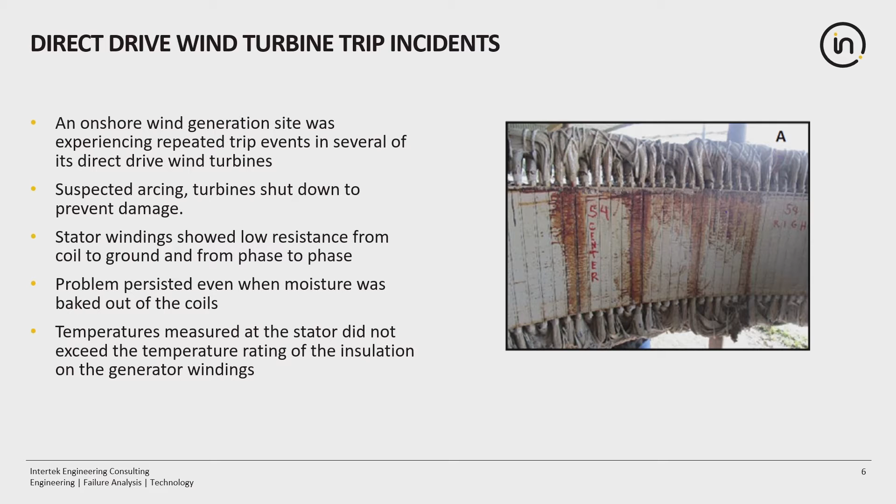So they started to work the problem: why is my insulation failing? They got together with their OEM, who was very supportive of their operations on site. Of course, they were still in warranty, so some people have mixed experiences with that. But we're talking about operational excellence, and there was some really good stuff here.

They got together and decided to do some test rewinds on some of the units in the key areas where they were seeing melting. They were going to replace the existing conductor with a higher capacity current conductor and increase the amount of insulation so that the resistance from phase to phase within the motor was high enough to continue operation. There was no evidence of arcing shorts in any of the windings when they were taken apart, so they weren't concerned about the loss of total insulation within the unit.

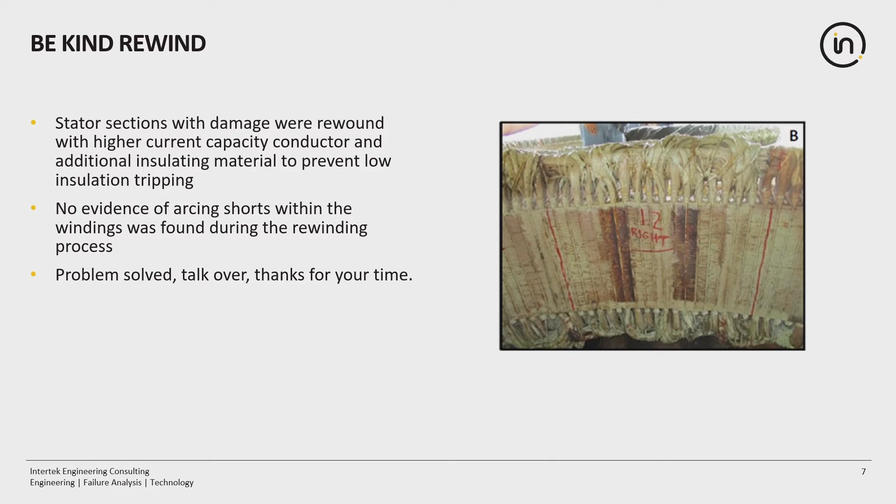They buttoned things up and began operating again. Of course, if that was where my slideshow ended, I'd be well under time. And so we know that did not solve the problem.

In fact, less than 3 months after rewinding the units, they started seeing the same sort of trip signals. They opened up the units and found that the places where the rewind was performed had a much more aggressive quantity of insulation and melted, degraded material, both in the individual coils as well as migrated out through the ferrite stack.

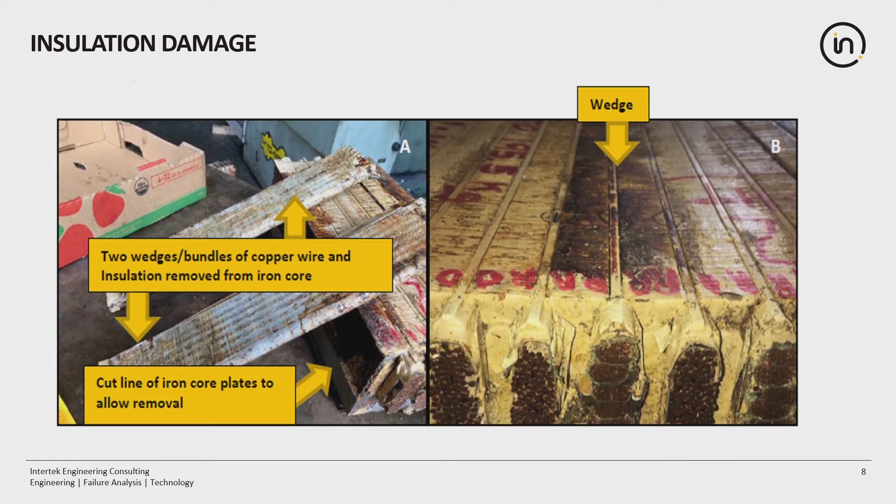So we can see detail here. The replacement windings, you'll look, are substantially degraded. Some of them have some dark material that was from cutting. We confirmed with the vendor that they were using a high-speed saw, so that wasn't actually induced from the generator itself. It's good to know, if they hadn't been keeping track of that information.

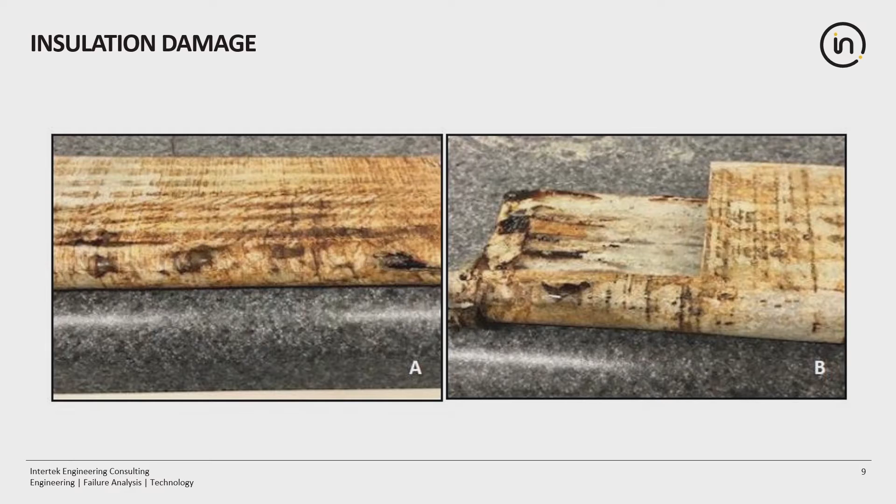It would have been better if they had used something a little gentler to cut it, but they were in a hurry to get it out and get it back to us, so we try to remind people that how you extract your samples impacts how quickly it takes to figure out what's going on with them. But we looked and found that they had double wrapped with fiberglass, and the material within the fiberglass insulation had migrated substantially.

There was a concern from the operator that the supplier of the rewinding and the original equipment had not furnished appropriate insulation. It was supposed to be NEMA Class F insulation, which can go up to about 145 degrees C. And so we performed testing to verify the material content.

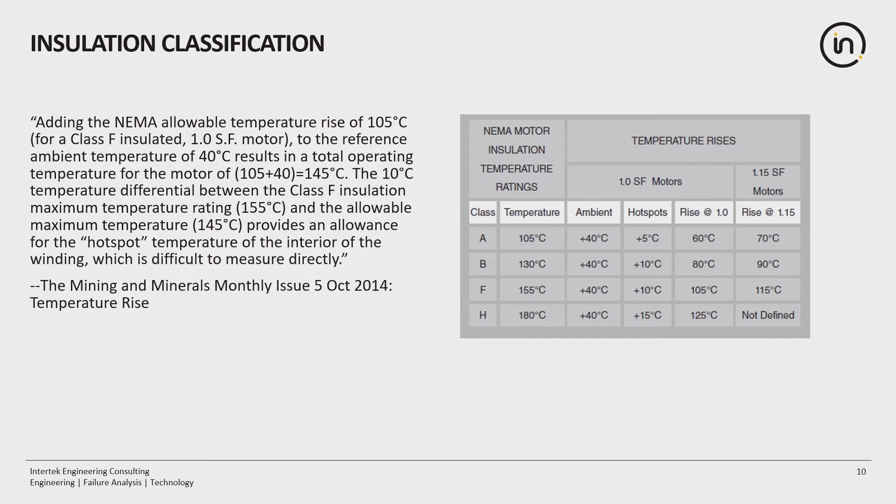Of the fresh rewound units, because they were doing this on multiple units, they were able to pause the process and get us samples at different steps, both the replacement and the original hardware. We tested a wide variety of it using FTIR, DSC, TGA, and visible spectroscopy techniques to validate the chemistry, bonding, degree of polymerization, and all of the resins, epoxies and fibers within. Every section of everything we found was determined to be consistent with a Class F insulation.

When this insulation was measured in the damaged state, it did not perform up to the task because it had been degraded. However, from the fresh, new insulation material that we had, we were able to discern that you cannot physically get resin migration below about 180°C. That was the first onset of melting observed across all of the materials.

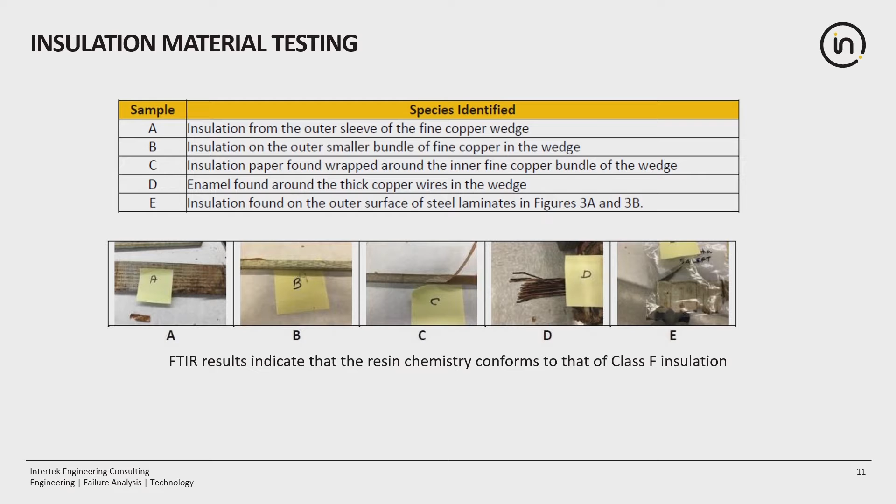If you have liquid leaking out of the coil, you know you're well above that 145 safe operating limit. The insulation damage on the factory and repaired sections were the same, and the DSC analysis suggested that the stator temperatures were around 180 to 200°C, and that was what was causing the enamel to be degraded and migrate.

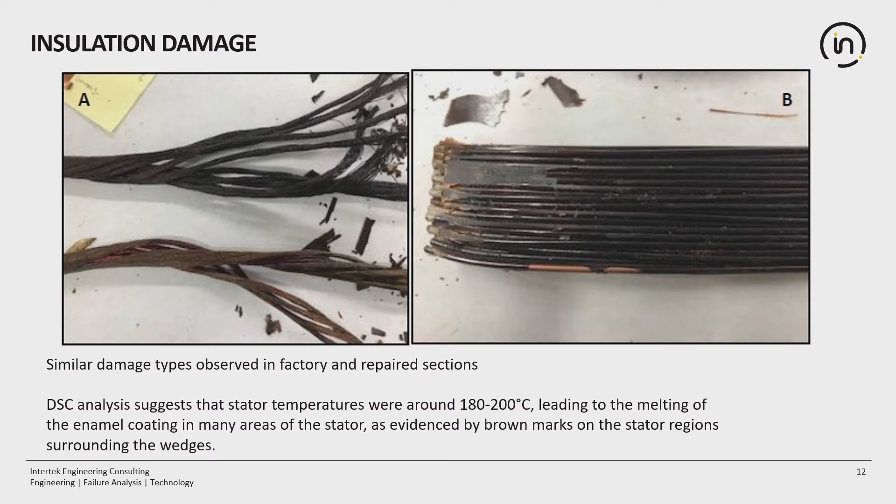So the ops person comes back and says, but I'm not measuring any temperatures above 120°C, right? So obviously they have a temperature signal.

However, it totally ignored the fact that the nacelle as a whole was not operating as one thermal volume. It was basically two thermal systems separated by the turbine deck, which isolated heat transfer from the air volume below and above. The below volume being inaccessible also meant that when water accumulated, it stayed there for a while, could ingress into the coils, and dissolve partially some of the polymers, loosening them up and reducing their ability to withstand current.

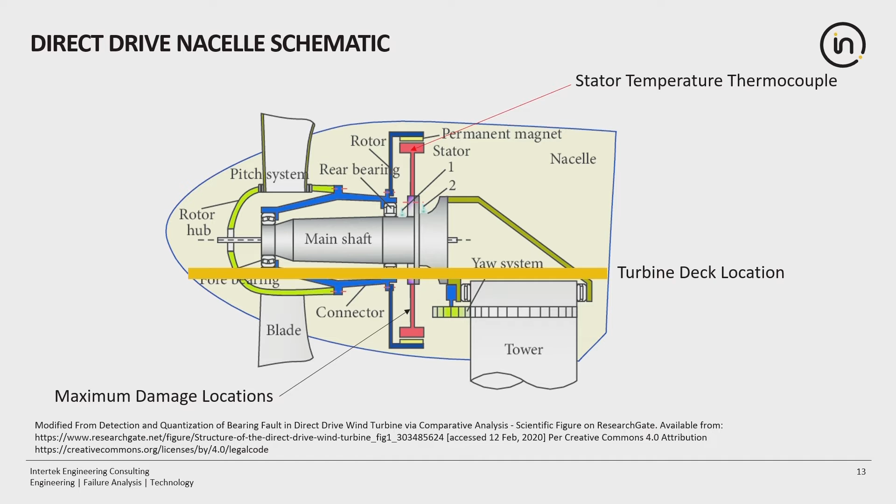So what does this mean? It means we have a measurement, but it's in the wrong location. When we looked at the damage map from all of the units, every single one of them, most of the damage was between the 8 o'clock and 5 o'clock position on the stator. So pretty clearly everything below the turbine deck was getting heated up, and it didn't matter what the temperature above the turbine deck was.

That was a big clue that this wasn't insulation degradation caused by current or induced by some electronic problem or manufacturing or rewinding problem, but that this damage was a thermal problem, which suddenly made everything make sense. Initially these units had started to fail prematurely, sure, but we're talking about 5-6 years in the field from commissioning.

When the repair happened, it was only in a few months. Why would that be? When they did the repair, they increased the current carrying capacity of each coil in the damaged section, and then they doubled up on the insulation.

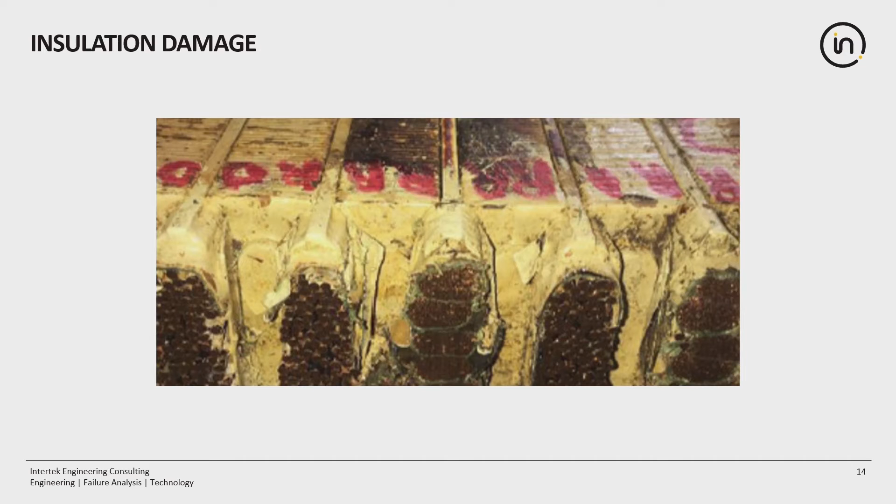Doubling up the insulation sounds great to prevent electrical faults, except for the fact that the electrical faults are being induced by heat generated in the conductors melting the insulation. If you double up on the amount of insulation, you're much more likely to have heat stay in the conductor near the wire, where it's going to damage the insulation, melt things, and continue this cascading failure.

So the stator insulation failure was driven primarily by thermal degradation, assisted by moisture ingress. We had localized elevated temperature degrading the enamel. There was a lot of turbulence on this site, and because of the way the direct drive works, the magnetic field is not uniform during operations, especially when there's a lot of non-uniform loading on the blades and speed changes.

And turbulence acting on it. Basically, magnetic slip compensates and allows the direct drive to move at different speeds. When that slip occurs, you have hot spots that get generated. They're very hard to model. So post-repair, they failed a lot faster because they didn't mitigate any of the underlying issues.

The takeaways here: operating safely can prevent expensive catastrophic events, right? They did stop operating when they were getting this repeat error that could have turned into a fire. Even when everyone's working together, it's possible to hurt yourself a lot by not solving the problem before you understand it. You want to examine your equipment, your operations, and environment while identifying and troubleshooting a failure. Otherwise, you'll miss the context that's telling you what the root cause is.

Another takeaway: electrical insulators are typically good thermal insulators, which means if you have a heat problem, they're going to make it worse. Having a sensor does not mean that you're measuring what's important, so you need to think about sensors in context, and a holistic view of failure enables safer, more productive operations.

Everybody coming together at the very end means that they managed to solve this problem. They redesigned the cooling system, and they're going to be operating for years to come.

I haven't heard from them at all. It's been very bad for my bank account, but very good for the customers.

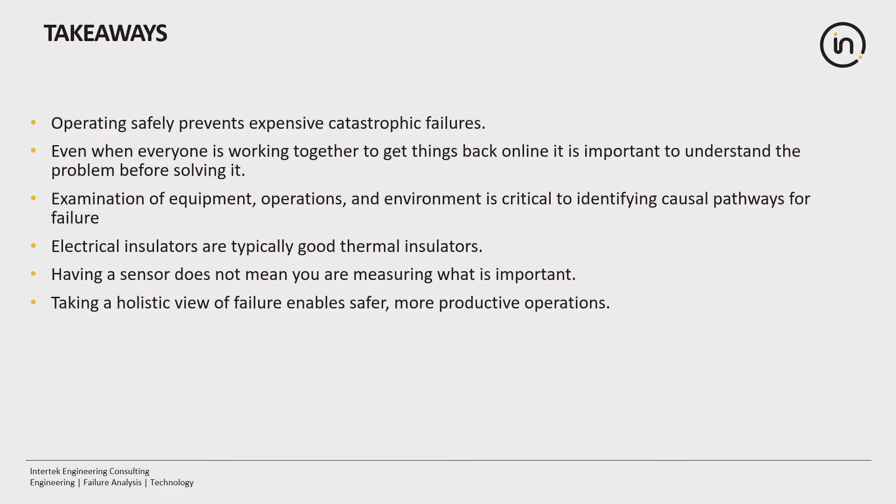Thank you, John. Very interesting. How many times have we thought that we knew what the problem was, we implemented a fix, and then the problem started happening more rapidly, right? It's a questioning attitude that's really, really important.

So I want to continue on with this theme, and I'm going to welcome Kim. Kim, same question: who are you and why are you here?

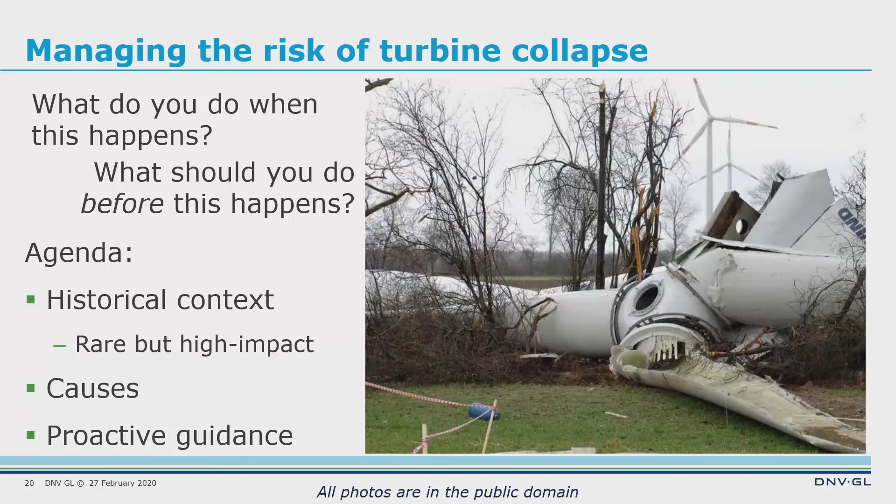So, what do you do when a turbine collapses? In this talk, I'll be discussing how common or uncommon turbine collapses are, some of the causes, and really trying to provide some guidance for mitigating the risk, and essentially answering the question: what do you do before this happens? I will start with the data that we were looking at.

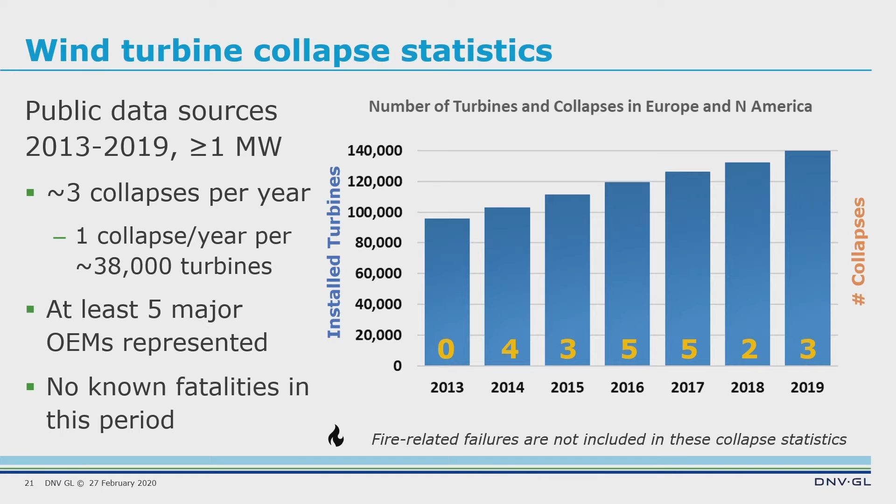These were spread across 5 major OEMs. There were a few of the 22 collapses where the OEM has not been identified. During this period and in this region, there weren't fatalities involved, and there was also no impact on the public that we know of. Just to note that fire-related failures are not discussed here; it's a topic for an entirely different talk.

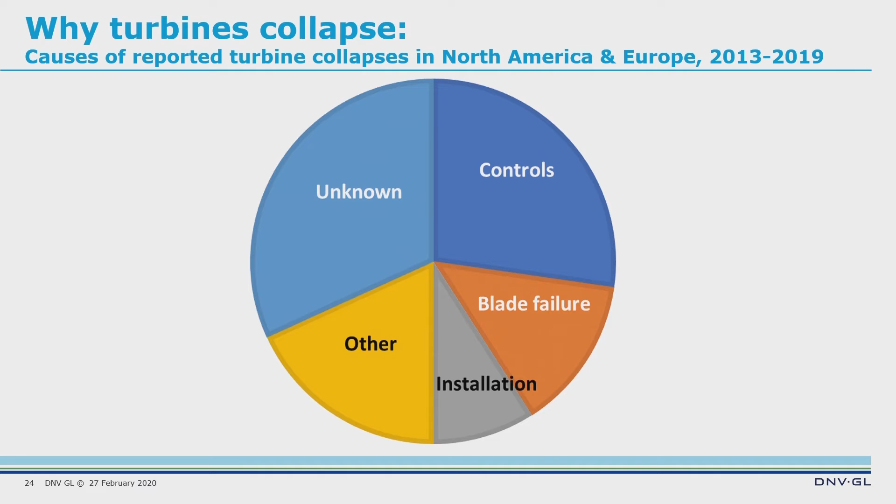So let's start with what are the causes of these collapses. We divided them into categories where it was known. In about a third of cases we didn't have a cause that we were aware of or had access to, so any of these other categories could be broader. Controls I will talk about more in detail, and then the other ones I will basically mention in terms of how you would mitigate the risks. You can look through these later.

So what do we mean when we say controls was a cause of turbine collapse? I will give a couple of brief examples. In one example, a pitch system failed to pitch the blades, so the rotor was not able to slow down, and instead it led to an overspeed, and the stress on the turbine tower caused it to collapse.

In another instance, sometimes collapse is caused by a slow or relatively slow response to a very rapid change in environmental conditions. For example, if the blade finds itself in a kind of deep stall condition and the turbine controls aren't able to rectify that situation fast enough, then the blade can strike the tower and the tower collapses.

You can hear that in these examples, there's a couple of different aspects to the control systems. There is the software, the algorithm telling the turbine what to do and what takes priority. And then there's also the physical hardware, for example, a pitch motor. So the reliability of both of those components is critical.

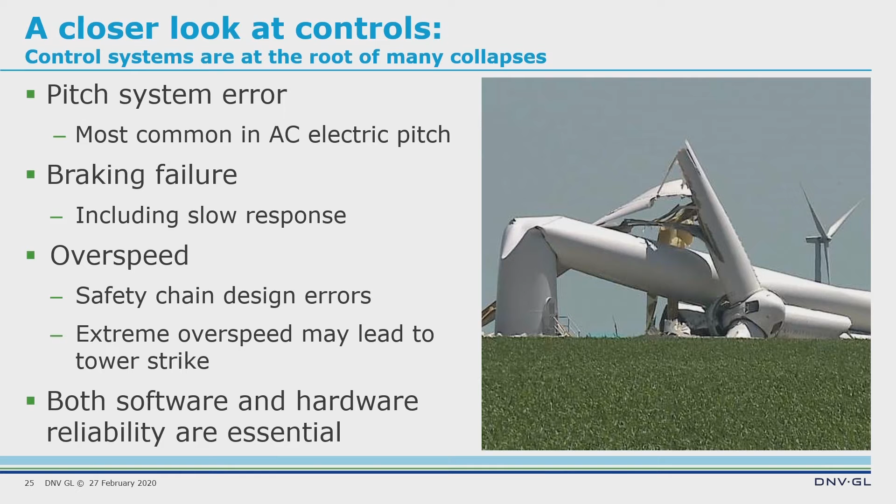So let's talk a little bit about what you can do before the collapse to mitigate your risk. Again, starting with controls, we have just heard a case for a root cause analysis. In this case, we'd also recommend a thorough, independent, and timely root cause analysis. That's true even if a turbine collapses on your site, but also if it's a similar technology elsewhere in the world, then you're asking the OEM about that root cause analysis.

If you know that this is caused by the control system, our strongest advice here is to get your control system updated promptly. And that does require a relationship with the OEM, so it is more of a challenge for turbines that are no longer supported by OEMs.

Also just raising a question here, as turbine controls become more and more complex, so they're already regulating turbine performance, they're being used for loads management, and they're also involved in the safety chain, are the IEC standards to which turbines are certified evolving as rapidly as the changes in turbine control systems? I think it's an interesting question to discuss.

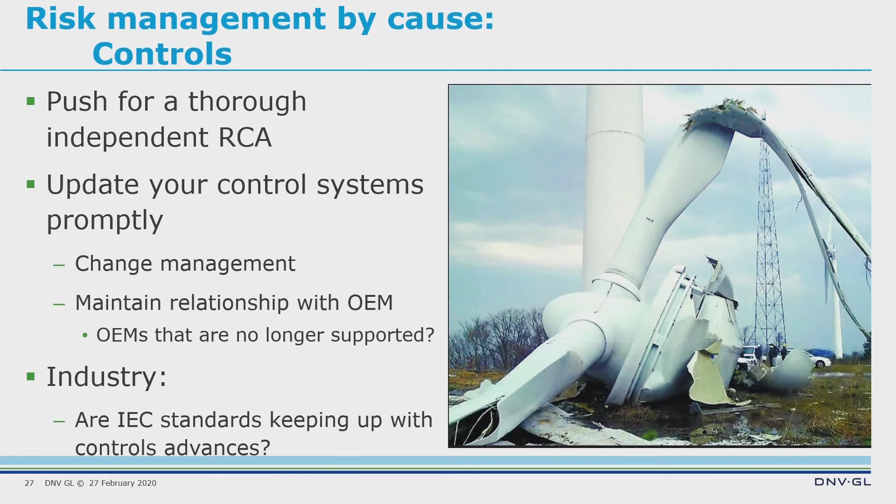So blades, you have heard at least one mechanism for collapse would be if a blade strikes a tower, but there are other potential mechanisms. For example, a blade had been repaired, but it subsequently failed. It did not strike the tower, but the turbine wasn't able to recover from the imbalance that was caused by the sudden blade failure, and that tower also collapsed.

My colleagues found, they reported a few years ago that about half of blade failures were caused by a manufacturing defect. So we are really recommending that you understand the quality of your blades right from the very beginning. So visiting the factory if that's possible. And then throughout the life cycle of the blade, following through with inspections and documenting and recording repairs so you can really understand the history of the blades in your fleet.

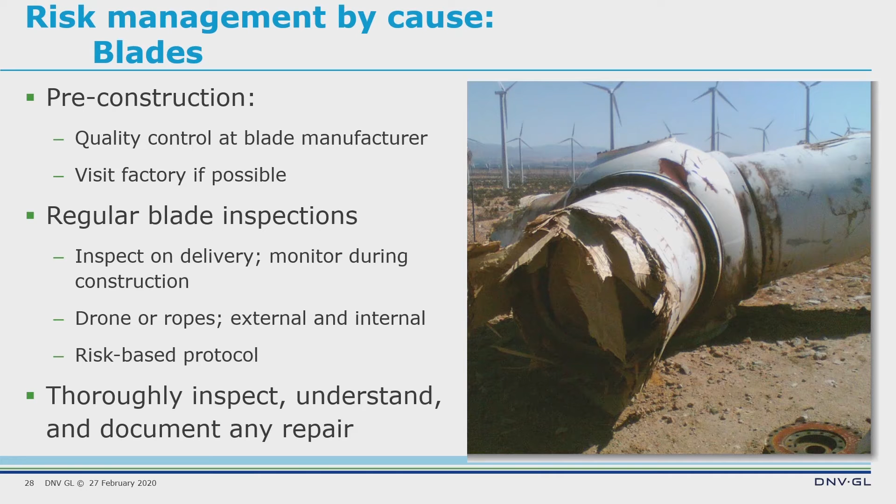We will hear more about foundations, and I think see this image again later. So I'll only note here that we advise storing data such as tower vibration data historically so that you can look for trends later to better assess the health of your tower and foundations.

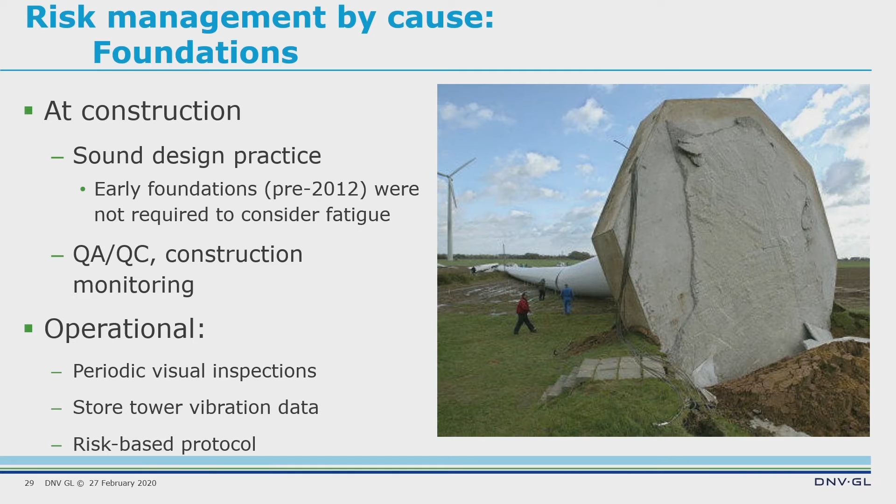With construction, I will only note that, as production tax credit deadlines near, it can be more challenging, as we know, to maintain operational excellence, to maintain quality and safety measures. And we certainly know that many folks in the industry are doing that. Just want to emphasize its criticality for mitigating the risk of disasters such as the ones we're talking about.

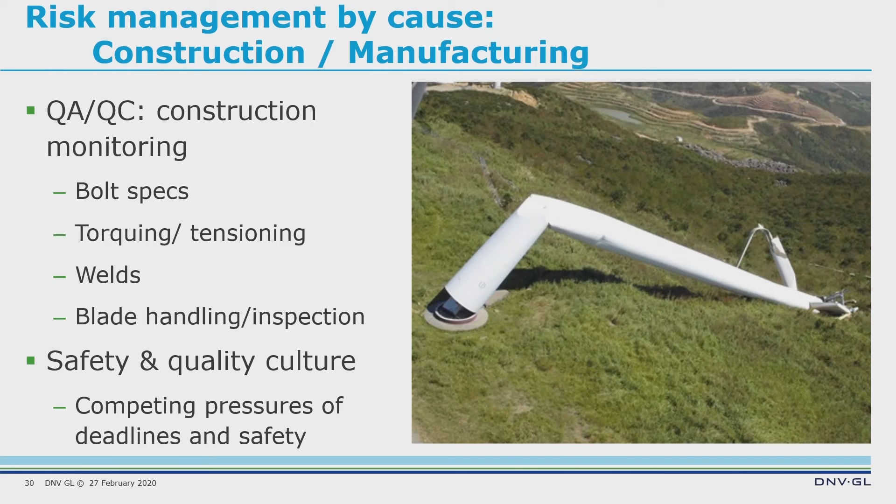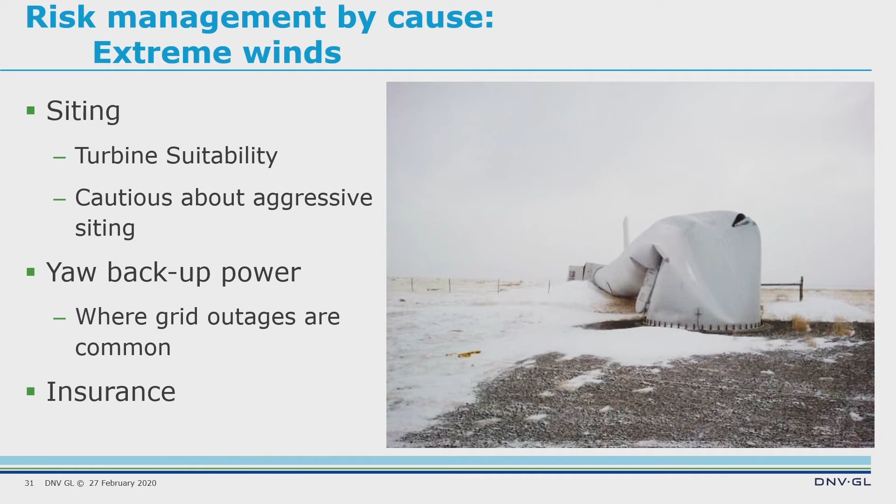Now, extreme winds also occasionally cause turbine collapses. There's a few things you can do in the development phase or when you're setting up a wind farm, but in the end it may come down to the insurance terms if an extreme wind event hits your site. So in that case, we really recommend understanding the terms, understanding what your risk exposure is.

For example, if force majeure and if lightning is not covered, what will you do in that situation, kind of understanding your risk there. And being aware that if a turbine does collapse, it can take more than a year to be replaced. So evaluating that in your business plan.

So finally, if we have one, well, we have a couple of major takeaways here, right? So we're certainly advocating for operational excellence, following best practices at all stages, from the construction right through operations life cycle of the wind farm.

And we also strongly urge people to understand any updates to the control system and to implement those promptly. We really just can't say strongly enough how much we advocate sharing of data across the industry so that we can learn from each other's issues.

And finally, the images that I've showed in this presentation thus far can be kind of dramatic and can be used to scare the public. And so we want to say that we showed here through statistics, the risk of turbine collapse is there, but it's relatively rare. And there have been no known impacts to the public, so the risk to the public is very small. And that we as an industry are kind of sharing that relevant information and also sharing that we're doing all that we can to mitigate risks of disasters.

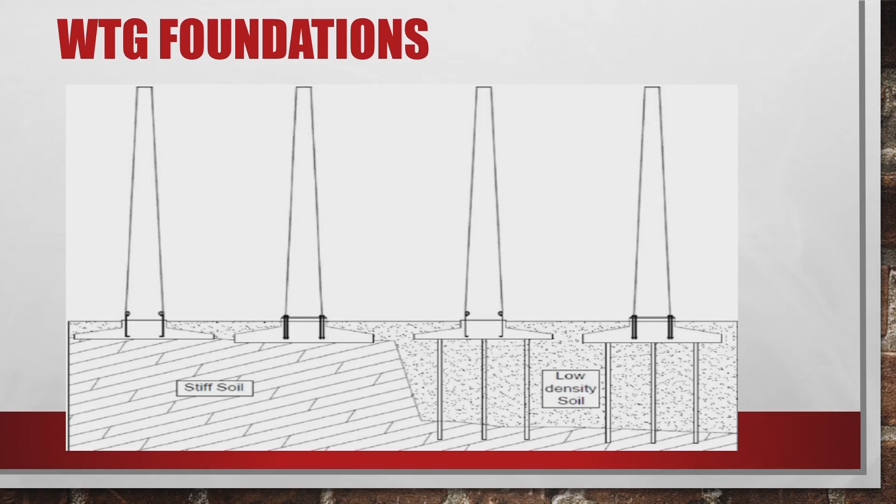Now this sketch, the reason I put this in here is to give you an order of magnitude of the scale. This drawing is to scale, so you can see that little thing down there at the bottom. That's what I do, and that's where you have to pay attention.

The other important thing to keep in mind, and this is pretty much true across the board, I don't think there's any exceptions. I haven't found one anyway; if there is, I'm sure someone will correct me. There is no turbine manufacturer out there today that will warranty or guarantee the foundation. They only warranty or guarantee up to the tower, and the foundation is the contractor's or designer's responsibility. That's very important to understand, because all of the warranties and guarantees you get stop where that flange meets the foundation. So it's apparent why it's very important to pay attention to it.

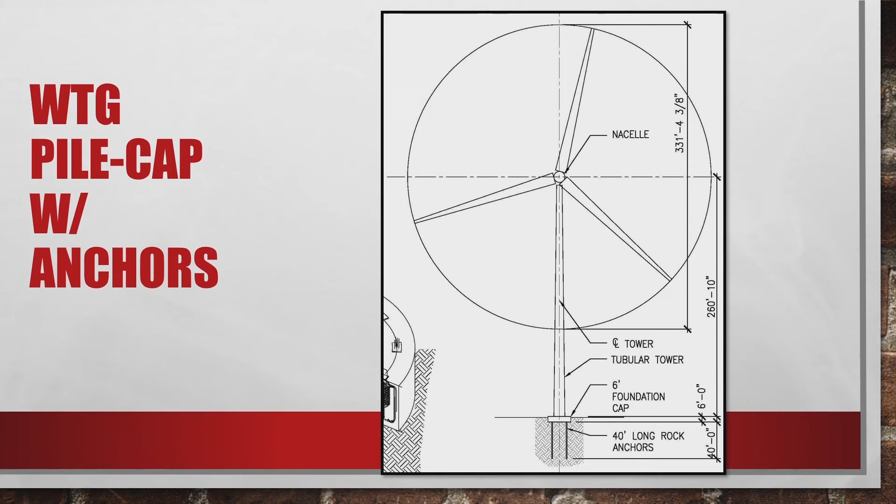My colleague earlier talked about issues with the nacelle, but foundation issues will shorten the service life, and they can, for lack of a better term, kill a project if they're not designed properly. So what do you look for? The biggest clues, and the first thing to remember, and I hope if anything you get out of this presentation today, is to at least look, because most people don't even want to look. But cracks, tilt, fatigue failure, and loss of rotational stiffness.

So what the tower designers have done is that they have allowed... well, so here are the scare photos. These are the scary photos, right?

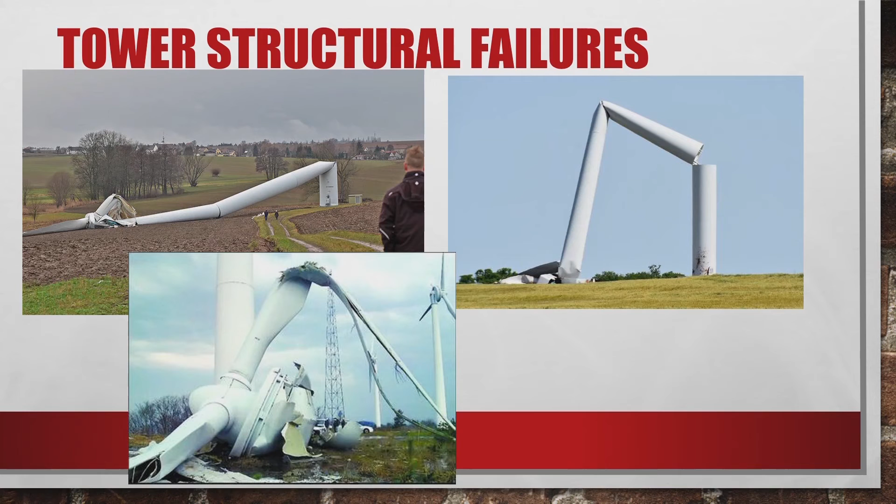No names, right? Everything is just somebody's project, so we don't want foundation failures. They're rare, but they do happen. This one is available - I downloaded this from the internet.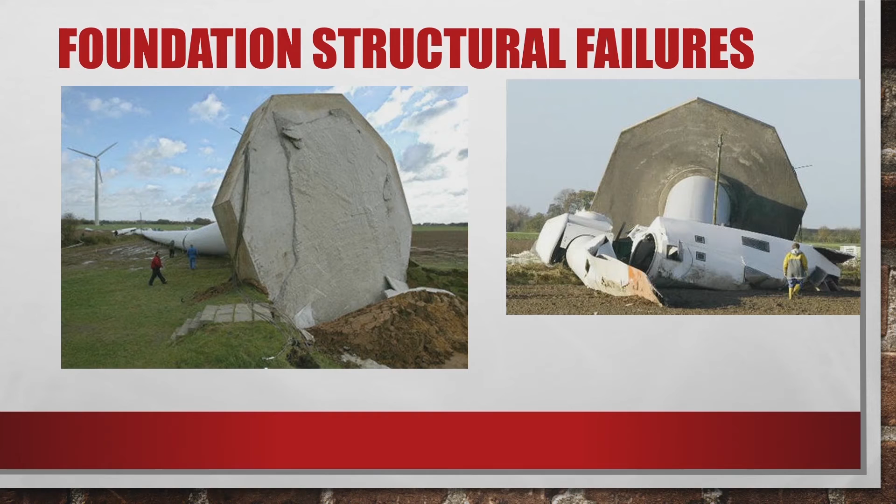But before they actually reach that point, even a little bit of tilt can render your tower dysfunctional. That's not technically a catastrophe, but if a tower is not able to function and generate power, that's a financial catastrophe. And then, if it gets worse, it gets worse.

As I was talking about, the growth of the industry is unbelievable. Things are getting bigger, larger, heavier, more demanding. It's gotten a lot more sophisticated. We've gone from little 6.6 kWs to now 5-megawatt turbines, and they're getting larger - 130 diameter rotors, these things are huge. That means you have to pay more attention to what's underground, which nobody warranties, nobody guarantees.

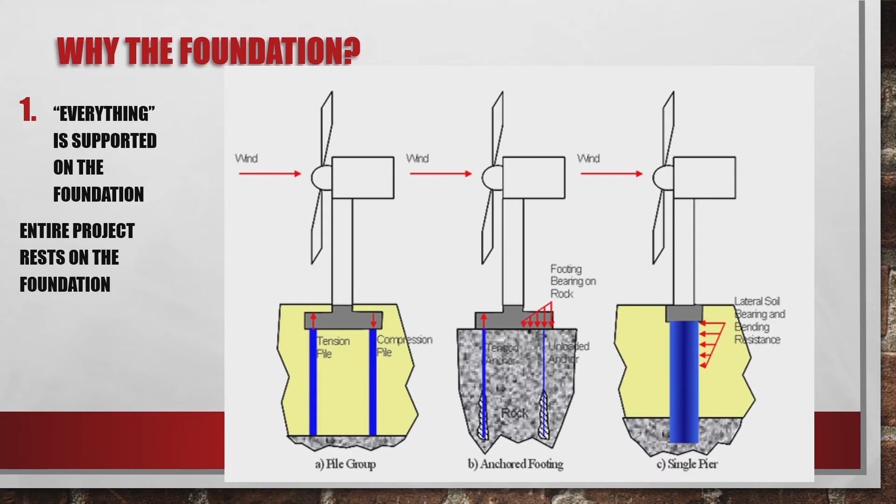So you as a project developer or project O&M manager need to pay attention to those things. As I said earlier, everything is supported on the foundation. So what do you look for? I'll give you a couple quick pointers of clues that you should be paying attention to that you can do on your own. You don't have to hire anybody or spend a lot of money, but before a foundation is going to actually show real signs of distress, it's going to give you clues. It's going to tell you that it's sick and that it needs attention. And they're very simple clues.

The first one is any amount of rotation. And when we're talking about rotation, we are talking about down to the 10th of a degree, or possibly even the 100th of a degree, which you can't visually see, but you can measure using some very basic instruments without having to hire anybody.

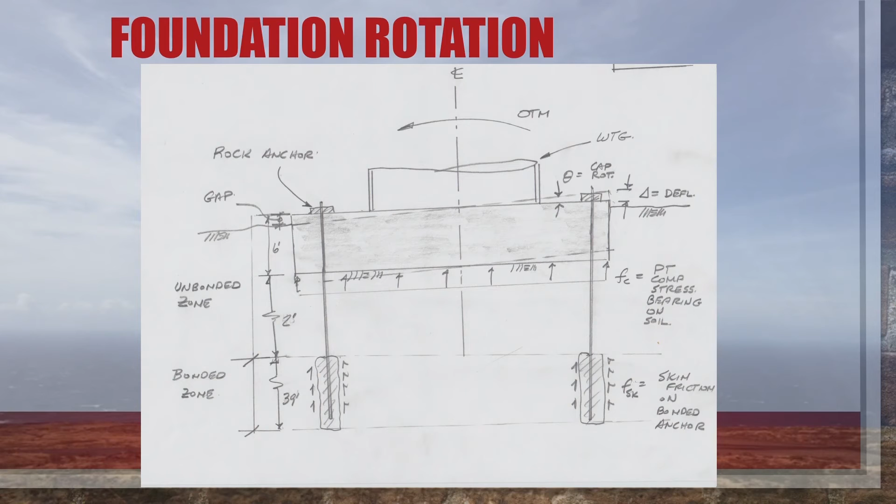And if you see - because the rotational demand on the foundation is very, very tight. Remember, I told you earlier, the tower designer and everybody above the flange line don't take responsibility for the foundation. So what they do is dump all those requirements on us, and we have to make that very rigid. So the first thing is rotation.

These are just some sample details from various projects, not any specific project. Here's the real equation: a very small amount of rotation is magnified up at the top with a tower tilt. So the foundation is very important - you need to measure that rotation and measure your tower deflections on a regular basis when they're obviously not operating or on shutdown mode, so you can see them in their true vertical or close to vertical, because there are limits on what that range is.

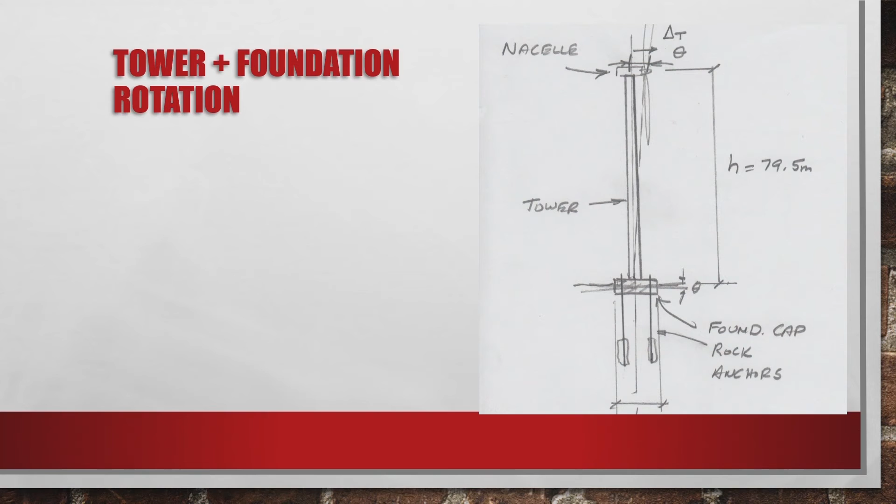Those limits vary from turbine manufacturer to turbine, from Vestas to Gamesa. They all have different ranges, but they all fall within a bandwidth. All of the turbine manufacturers have this - and this is all highly confidential to each manufacturer, so I won't mention any names or specifics. But for your specific project, there will be a range, and that range is good, bad, and ugly. Good is okay, of course. Bad, well, you can still operate, and ugly is, of course, ugly. So you've got to pay attention to that.

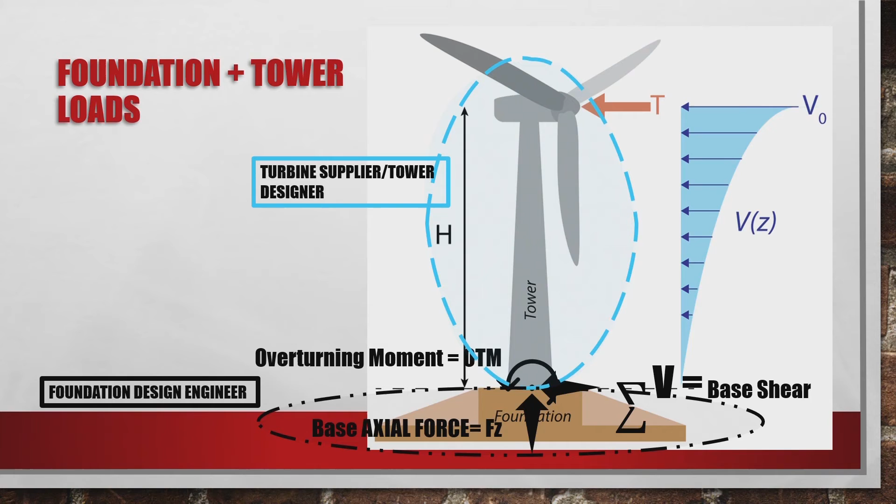Different kinds of foundations require different kinds of observations, but everything you're looking for is going to be found at the base - deflection, and the other one is cracking. We as civil engineers design all of our foundations to crack first before they fail. So cracking, even though it's ugly, is a signal that something worse is about to happen. We do the same thing with buildings too - we want them to crack first before they fail.

And you understand why? Because we want you to get out before it fails. We don't like the building to collapse, but having dead people is not a good thing to have on a resume. So we want you out of there. We actually design it to crack - it's meant to crack first.

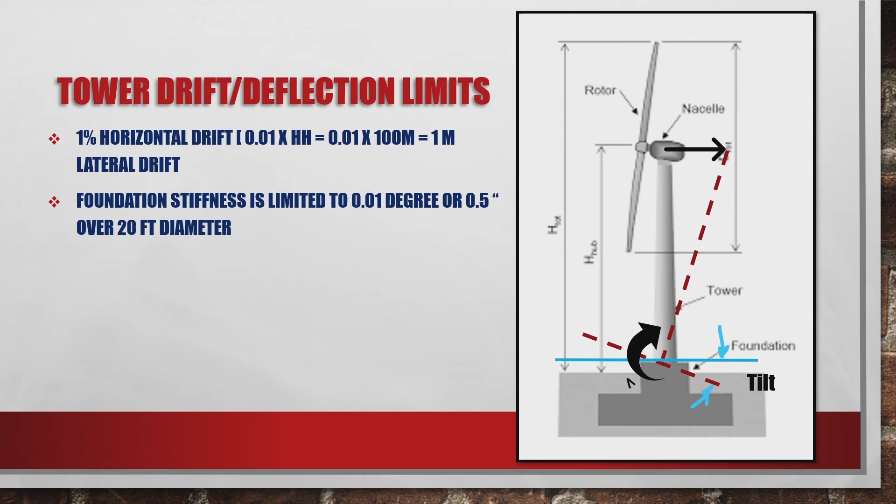These are signs, again, from various projects that I've worked on. I've been doing forensic work for 20 years for insurance companies and for owners, so I have a lot of these slides.

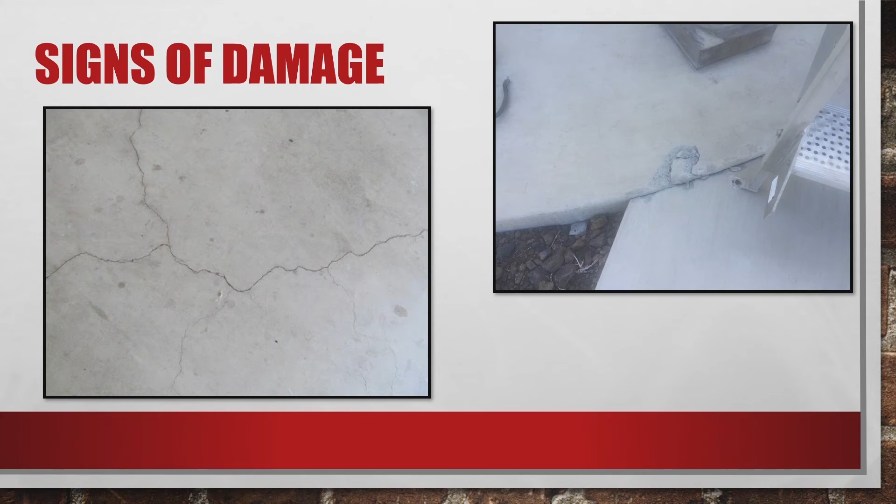And so it brings me to another end of our business, which is repower. Everybody's really big on repower, and repower is great, provided that your basic structure carrying all that stuff up there - everything up - can be replaced, even a tower can be replaced. It's very hard to replace a foundation. You can retrofit one, but the issue of repower now comes into what is the actual service life of that foundation.

You're getting into fatigue issues, so just pay attention to those things. That's all I'm saying. That's really my only mission here, is to let you know who we are and what we do, because you probably never met one of us or know what we do.

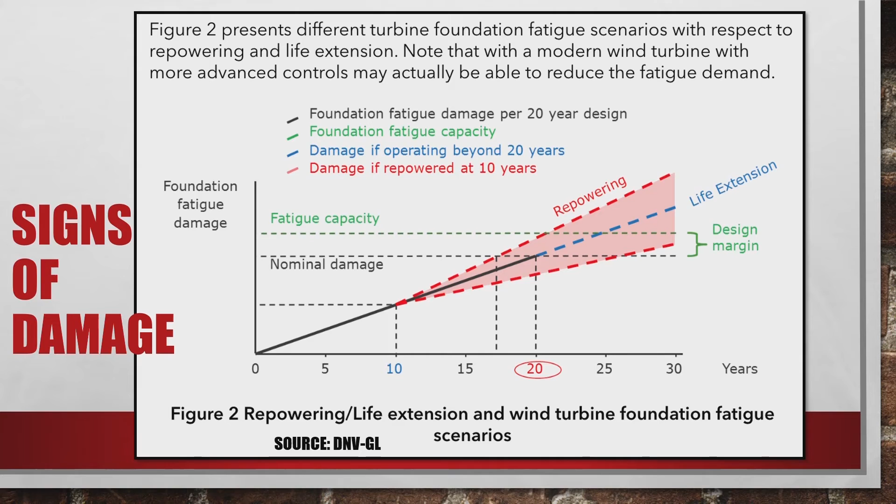So what are the signs? Here are your rules of thumb: deflection, deflection, deflection. If it moves, pay attention. Don't just assume that it's flexing, it's not yoga, okay? If it's moving, it's not good. It shouldn't move at all, but it's going to move. Cracking, any kind of cracking, pay attention. Rotational movement, not good.

And I will close with one in the spirit of our moderator. Since he started the joke, I'll finish the joke. An engineer, a lawyer, and a scientist were standing in line to get into heaven, but it was a little busy that day. St. Peter said, you have to ask a question that God does not know the answer to. The lawyer went first and said, was my appeal granted? St. Peter said, no, go to the back of the line. Then came the scientist who said, does God exist? He said, of course I do, go to the back of the line. Then the engineer came up, whispered his question, and St. Peter said, oh, we don't know the answer to that, and he got into heaven. The other two said, what did you ask him? He said, I just asked him when my kids were going to leave the house.